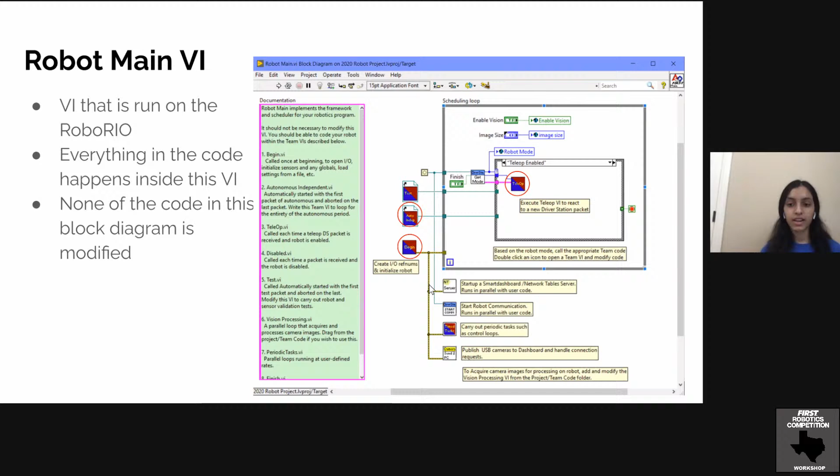On the left, you can see notes that describe what's going on inside the VI. Every subsystem has notes on what it does in detail, so you can read them if you're confused. Like the name says, this is the beginning of your code. This is the first subsystem that is run, and it only happens once.

Since it only runs once, we do things like initialize motors, sensors, and controllers because they don't need to be repeated. How we do those is by opening the various components and telling them where they're being plugged in. We then give each of them a name. This is because we need to use these again in another VI, and we identify them through a name.

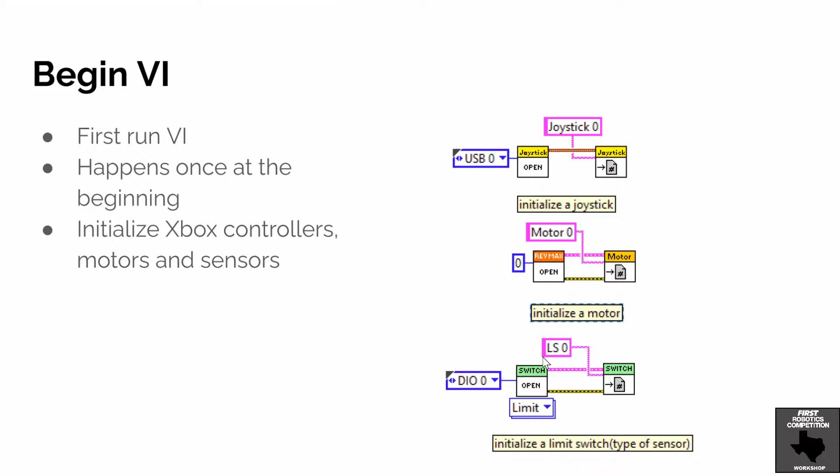Teleop is the other key VI in the arcade drive. And just like the other VI, it indicates what it does. The teleop VI is run when the teleop portion of the game is being played. This VI is run in a loop the whole time teleop is being played.

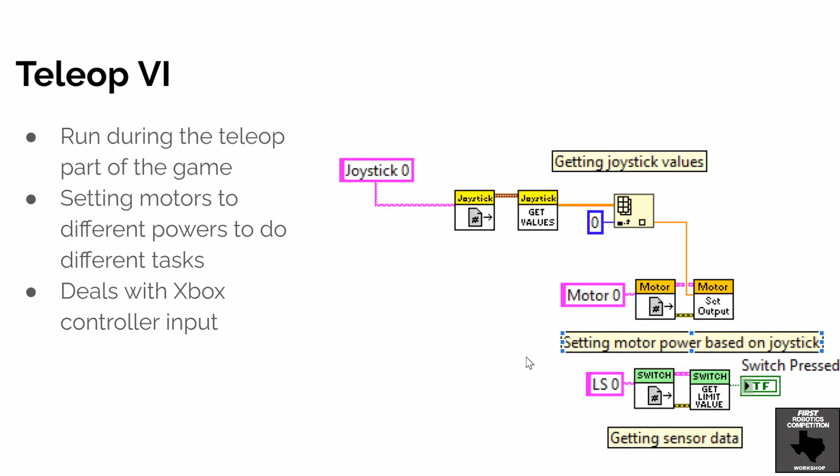Teleop VI primarily focuses on using input from the Xbox controllers the drivers are using to determine what speed the motor should go to. Like we mentioned, we use the names to identify each different component, and then based on driver controls, we change the speed for motors or use sensor data. In the code, we are taking joystick values and indexing them to get a proper X and Y value. Then we put those values into the motor set output.

Switching gears a little bit, we're going to go to command and control, which is the other type of project for coding a robot. If you notice, in Arcade Drive, everything happens in two VIs, begin and teleop. Command and control takes a completely different approach. It's based on the assumption that the robot can be split into relatively independent subsystems. For example, a drive base is coded completely different from a shooter.

Since this approach breaks every robot into multiple subsystems, the template code provided is more generic. Every robot is different, and everyone breaks their robot into subsystems differently, so that's left to the people coding. If you choose to make a subsystem, right-click on the target and go to New, and then go to Subsystem. This creates a new subsystem, which you can name accordingly. There is a bug with doing this with LabVIEW when you download it, but there is a fix which we have a link to at the end of our presentation.

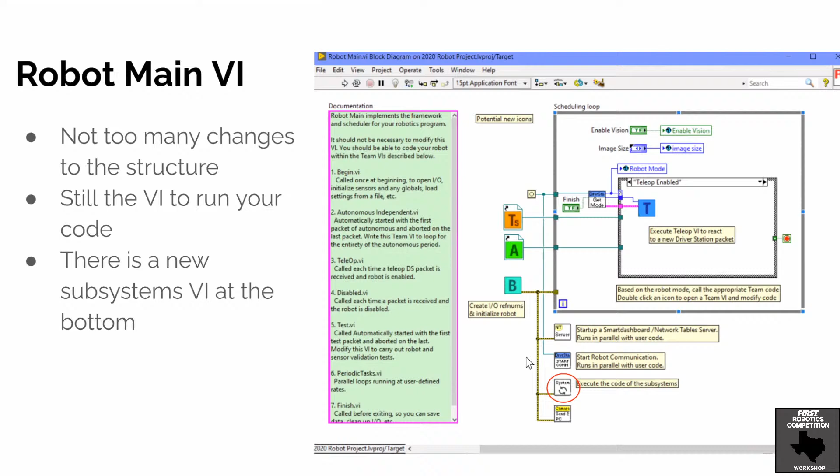In the code, the begin VI runs first, which opens all your Xbox controllers. Then the autonomous runs next, which executes your 15-second program. Lastly, the teleop VI runs, which is the driver-controlled period of the game.

A common trend you might be noticing is that these VIs are relatively unchanged in when they're run or how they are run. What we change is what happens inside the VI. And for begin, the major change is that we no longer create motors or sensors. Since we are under the assumption that each subsystem is independent, then we assume the motors are independent as well. Begin is much more general, so we do one-time things that apply to the whole robot. For us, we only open Xbox controllers.

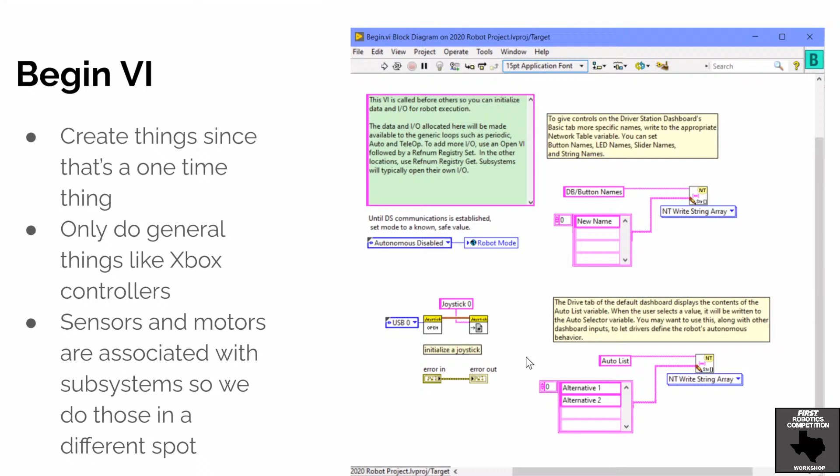The reason we don't give them a name is because that is only needed when you do it in two different VIs, like begin and teleop in the arcade drive project. But since all the code is in one VI, it doesn't need a name. Then we put all the code for setting powers inside the while loop because that happens repeatedly, like teleop.

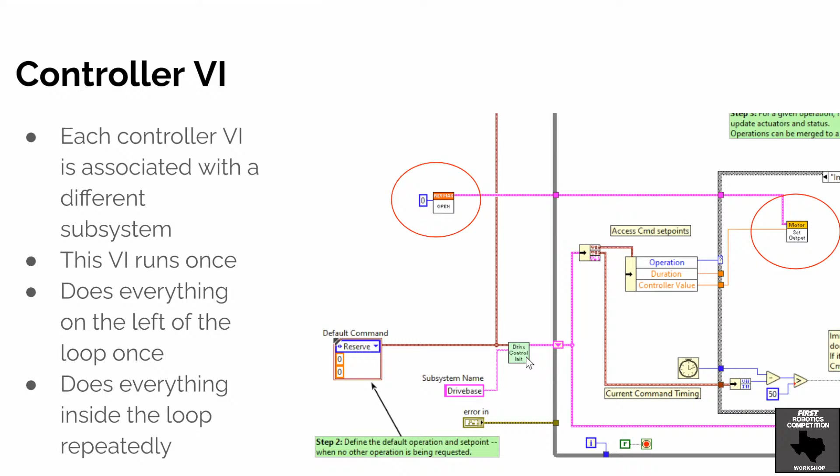Since the code for controlling motors is in a different VI, we can't do that in this VI anymore, like we did in arcade drive. But teleop is still the main VI being run during the teleop part of the game. How that works is you get the Xbox controller values and send them to each individual controller VI. To do this, we have a middleman VI called drive base immediate.

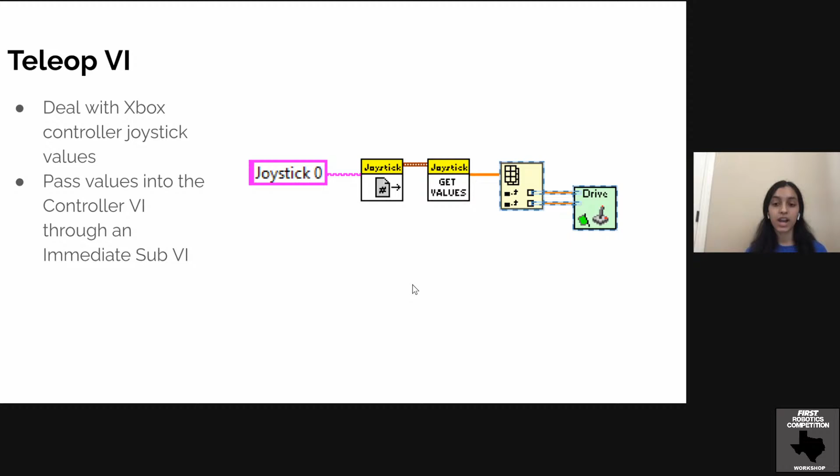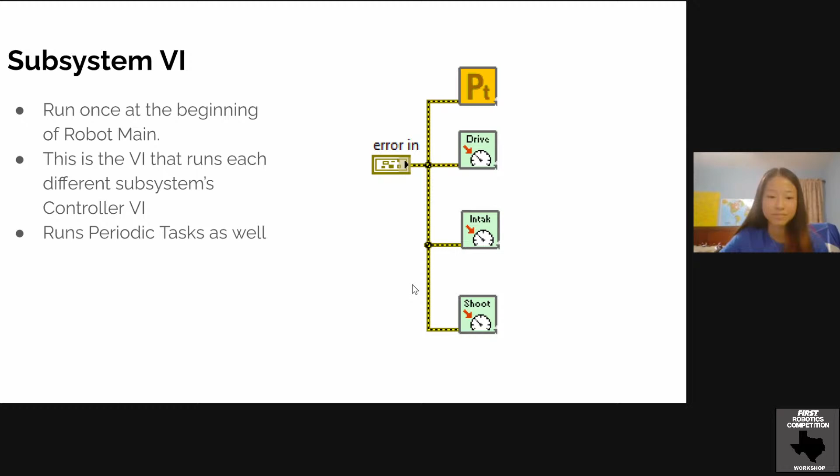The periodic tasks VI focuses on tasks that happen at the same amount of time. You can create as many loops and change the wait time, so each loop runs at a different rate. Most of this is used for publishing values to network tables for dashboard projects.

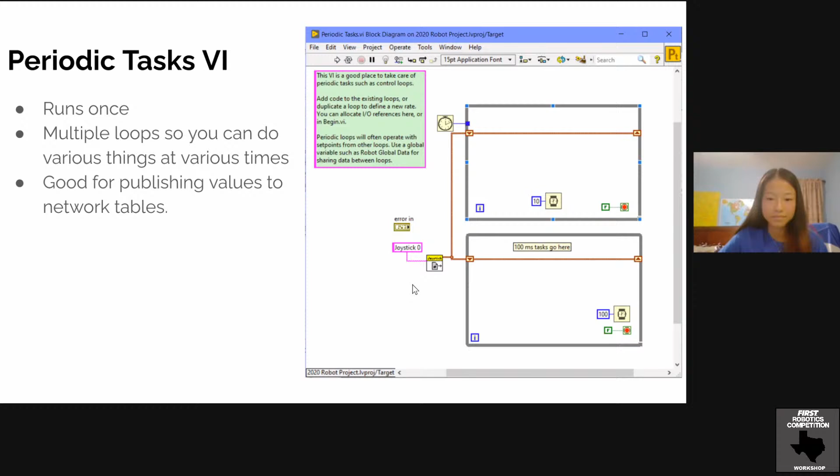So remember how we said command and control is based on the concept of mainly independent subsystems? Well, what if there's a dependency between them? For example, the shooter will only work if the intake has a ball. How can they communicate to each other to let each other know that there is a ball there? That's why there's a robot global data VI.

It's just a front panel where you can put controls to represent variables. So in our example, you would have a Boolean global deciding whether you have the ball or not. In the intake controller VI, it would write a value to that global, and in the shooter controller VI, it would read that value.

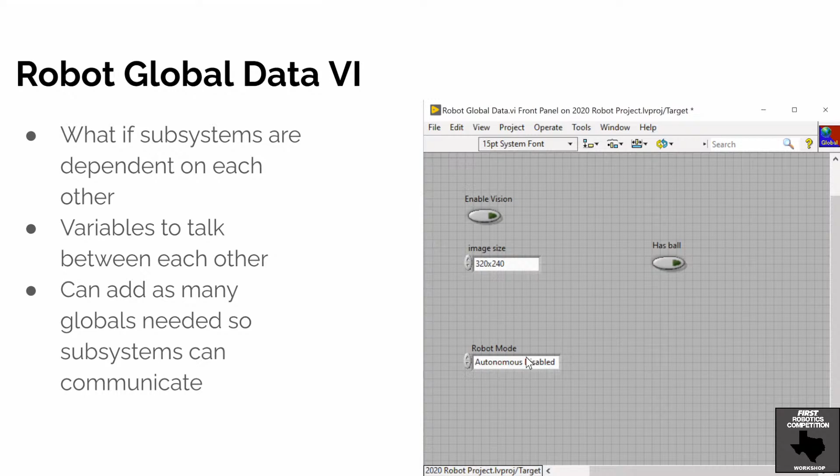Like the name says, this VI can be used for vision processing. If so, vision must be enabled in robot main. It works with most external cameras. You can take the feed and do anything you want with it using the NI Vision Development Module. A use case this past year could be detecting the power cells.

Like in teleop, where you use the middleman to send values to the controller, the autonomous VI does something pretty similar. It uses various VIs in the command section to send different commands. Instead of sending Xbox controller values, we pass in predetermined numbers. That eliminates the use of Xbox controllers, making it autonomous. When you group these commands together, that will be your autonomous program.

Now we know how to code a robot, but we don't know the most important part, how to actually run it on the robot. To do this, right-click on the target and hit Properties. Change the IP address to 172.22.11.2 and hit OK. These steps will allow you to connect to the robot through USB.

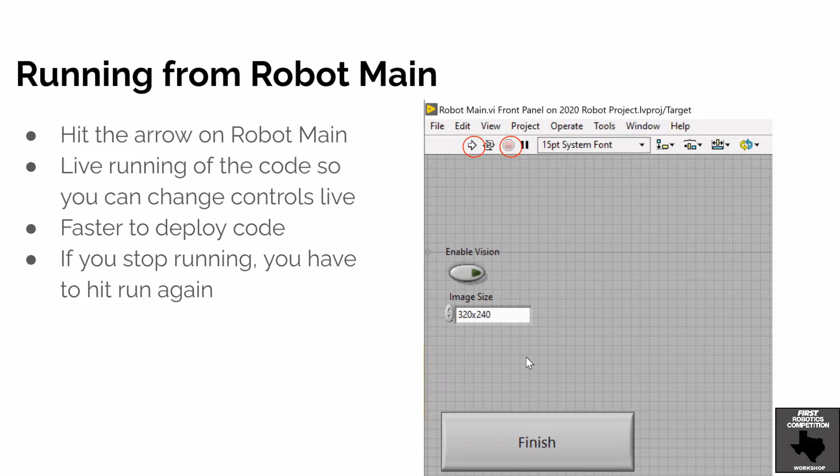When deploying code to the RoboRIO, you first want to open Build Specifications, then right-click and hit Build. Once it's finished building, hit Run as Startup. This will allow you to play the code on your robot. After deploying the code onto the robot from the dashboard, you can enable and disable the robot.

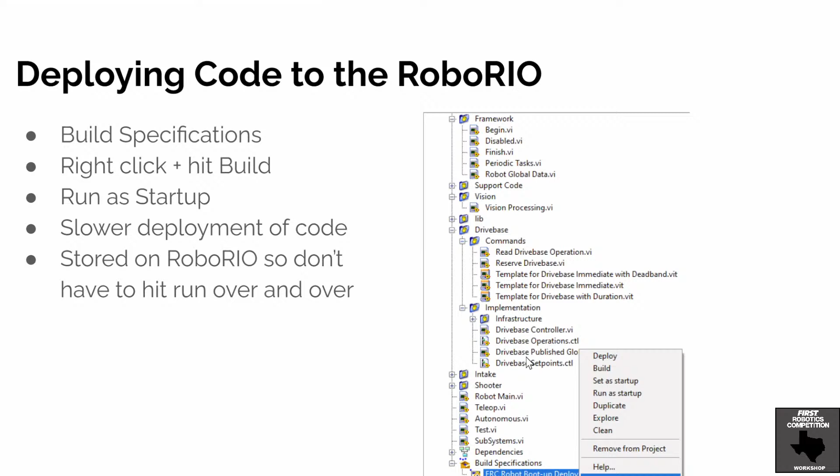The next few slides will show you the steps of coding this drive base. Let's get started. In the Begin VI, we open the joysticks and give them a ref num so we can access them later in the teleop VI.

Now in the Controller VI, you set the motors like we said before, and to do this, open the WPI palette, go to Third Party to get the blocks needed. First, we open our motor, and then we set the CAN ID values, which differentiates each motor. Then we set the output of the motor inside the case structure using an advanced set output block.

When coding a drive base, it's important to remember to reverse one side, and we do that by setting the inverse Boolean to true. To give the motor actual number values, we hook up the left and right set points from the cluster into the motor value, which are coming from the arcade drive block in the teleop VI. The other subsystems are pretty similar, only needing to change how many motors and what type of motor.

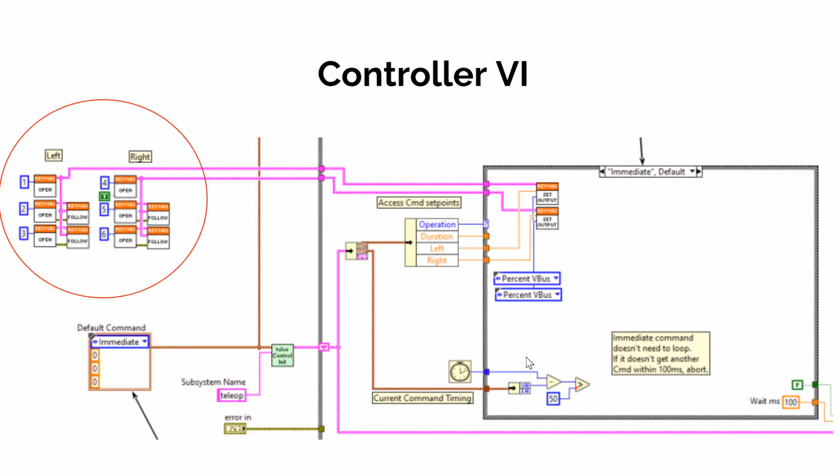In this code, we index the joystick values based on what indices the X and Y values are. Then we take those joystick values and put them into the arcade drive sub-VI, which makes the drive base move properly. The arcade drive block outputs motor values, which are fed into the drive immediate VI. And this goes into the cluster and the teleop VI as the left and right set points like we said earlier. We also passed in joystick values from controller 1 to the shooter and intake controllers for their motor speeds.

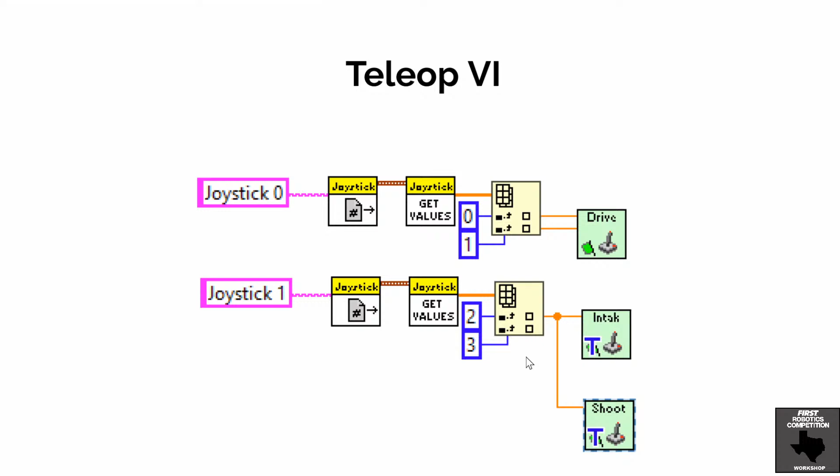Here's a fun fact for y'all that we couldn't pass up not saying on this presentation. On 2687 and 2468, we call the wires in LabVIEW spaghetti, since when there's more code and it gets messier, the wires look like spaghetti.

And now that we're talking about chefs and spaghetti, we wanted to show you a menu of LabVIEW hacks that we cooked up for y'all. Like, if you wanted to fix broken wires, you'd press Ctrl B and all the wires that were broken would disappear.

We have some resources for y'all that are interested. This is where you can find more information on the broken wire bug when creating a subsystem, like mentioned before. We have a lot of different resources that are useful.